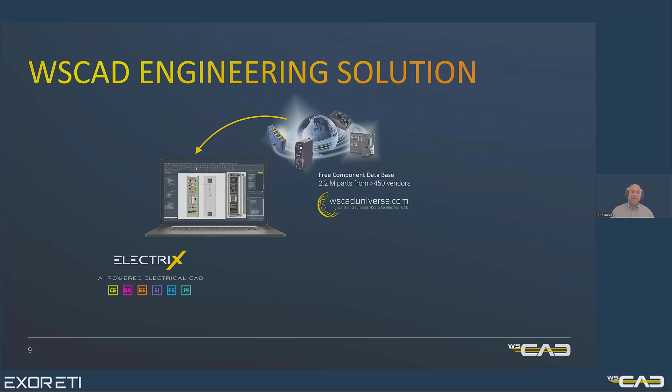The WSCAD engineering solution is built around 3 main components. The first component is ELECTRIX AI, the main engineering platform. This is where all design work is created. The second component is WSCAD Universe, the engineering data platform and one of the largest part databases on the market. It includes more than 2.2 million components from over 450 manufacturers, all available for direct download into the project.

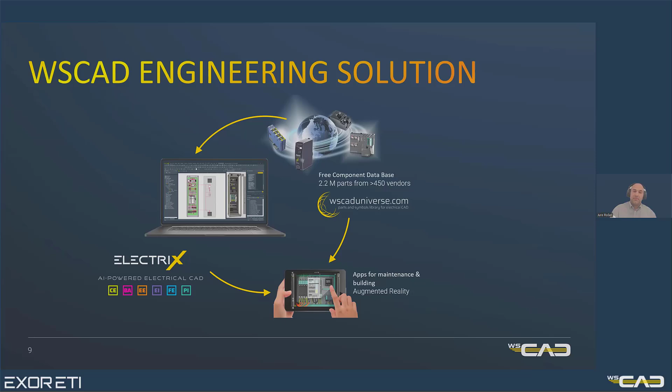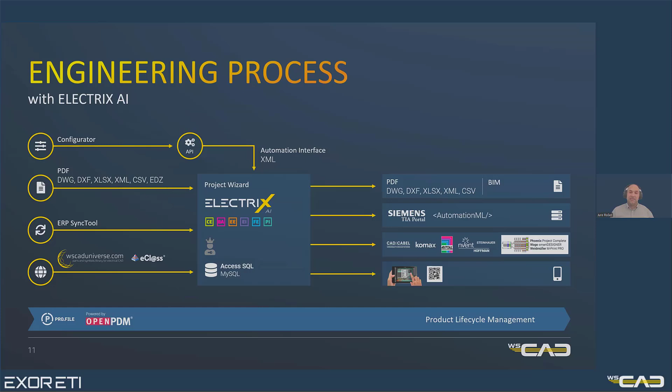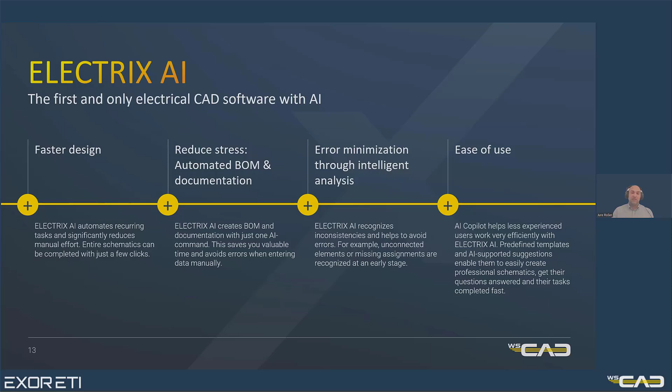AI also checks the project, immediately alerts you to missing connections or inconsistencies, and minimizes errors before they become actual problems. The AI Copilot helps users with smart suggestions, so even less experienced designers can work confidently. In short, AI accelerates your work, keeps your documentation clean, and reduces the manual effort in every project.

Let's check a few new features of WSCAD ELECTRIX AI 2026. In AI Copilot there is a new menu called Own Knowledge, which can be used to query information from different types of documents, PDF, TXT, DOCX, that were previously uploaded to AI Own Knowledge. These documents can be added for all projects or just for a single project.

We also have a new AI translation option and lexicon, which can be used to translate text into the listed languages. On cabinet pages, you can use a tape measure with adjustable measurement units. We could speak more about those features, but let's leave that to Gasper.

And with that, we have reached the main part of today's workshop, the demonstration of AI in engineering. I'm very happy to introduce Gasper Ponepšek. Gasper is a WSCAD technical consultant, and today he will show how AI is used in real engineering projects.

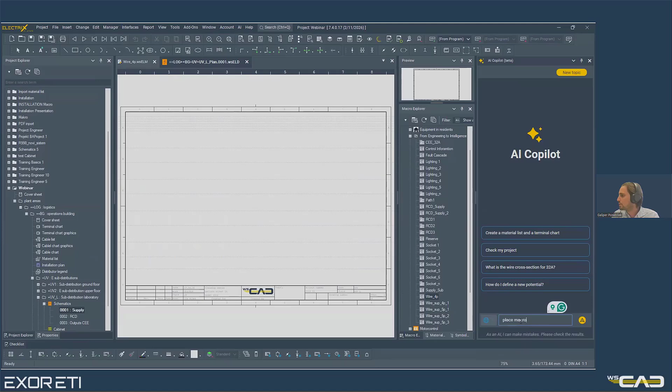On the left, you can see we have one project prepared. This is a brewery project. It's empty right now, and we will insert some pages in the laboratory field. Let's say 3 pages at first, and we will add the names of the pages: supply, RCD, outputs CEE. As we said, we will use AI Copilot a lot, and we can also place macros with it. With the hash, we can easily find, for example, supply for the first page. And you can see AI Copilot successfully placed the macro on the first page.

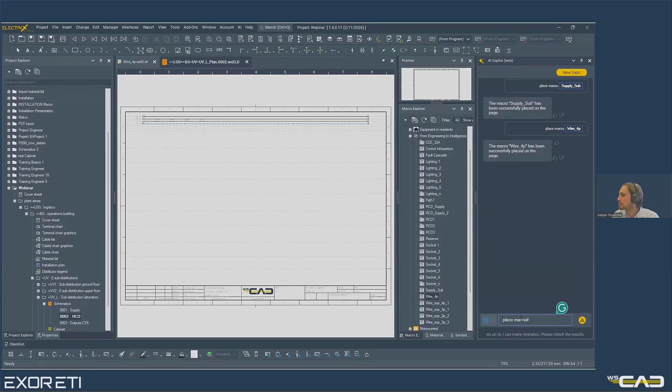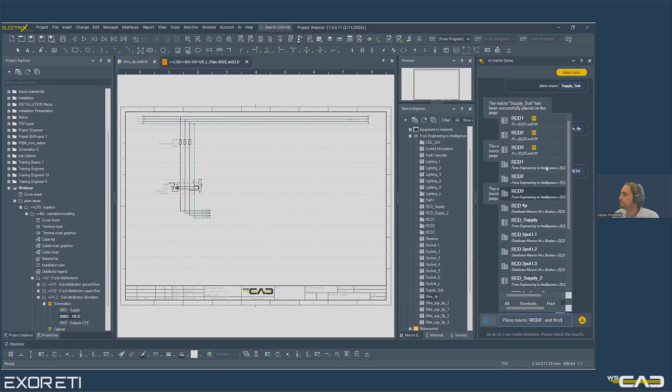On the second page, let's say we need wires. First, we just need 4 wires, and the macro is placed. We can also place more macros on one page with AI Copilot. We can place an RCD. Okay, AI Copilot placed the macro, and maybe we can place 2 macros with one command. For example, RCD2 and RCD3. Let's check if it works. Yes, first, second. You can see we get 2 macros from one command.

On the next page we can also check another thing. Place macro, again we need wires, so 5 wires for CEE. No, I don't see any macro, so we can correct it. No, it's not. Yes, here we have the macro.

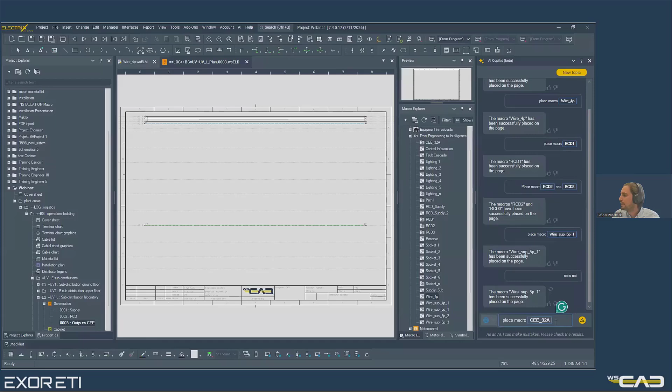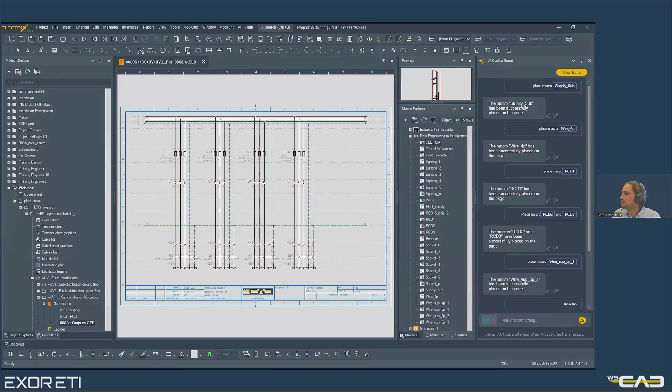We can also place path macros. We can check this CEE for 32 amperes, and let's try to write 4 times. We will see what happens. You will see AI Copilot placed 4 macros. That's good, but still, in my opinion, there is a faster way with Project Wizard.

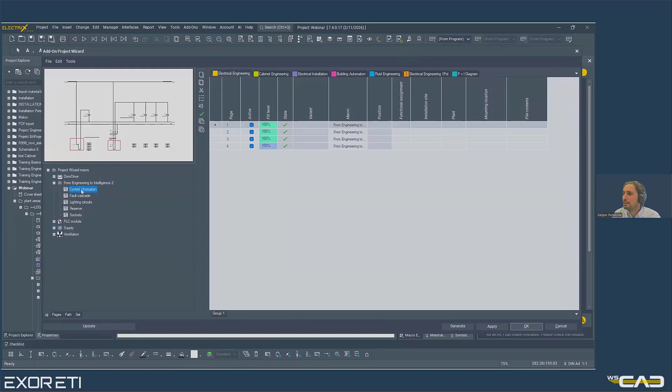Project Wizard, you also get a light version with a Professional or above license. What we have to do now is place some new pages so that we have more schematics. We'll place the page macros, as you can see. We have to rename and also change page numbers from 4 to 8. And you can see this is actually the brewery project. The structure of the project is quite complex.

So we have to fill in the functional assignment and installation site, and of course define the mounting location of this laboratory. What is also missing are the names of the pages. So we can click apply and generate. And here, of course, we have to define where to generate, in the laboratory field. Okay. The pages are generated.

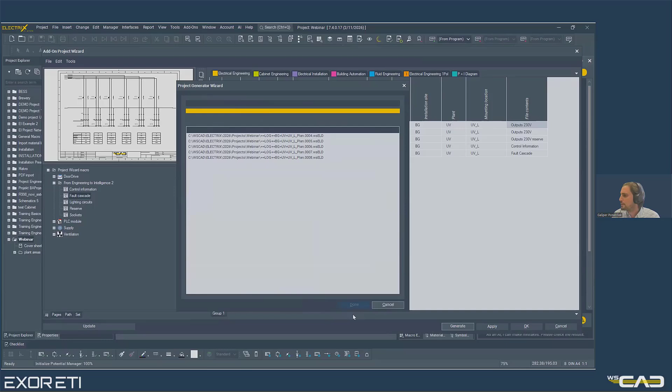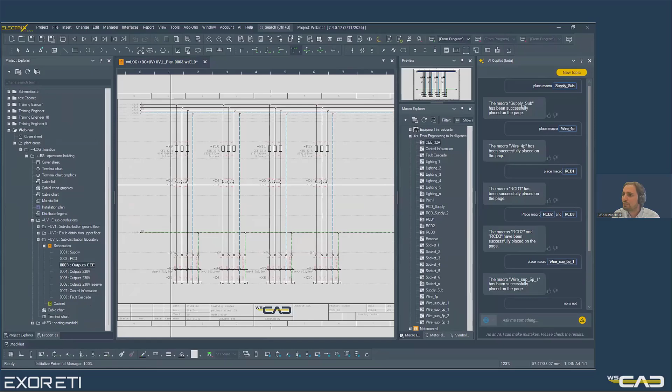We can just remove the additional window to the left, and you can see we have more pages. So here on the next page, control information. Great. You can see here the cross references. We just connected the previous design, so contactor with the next one.

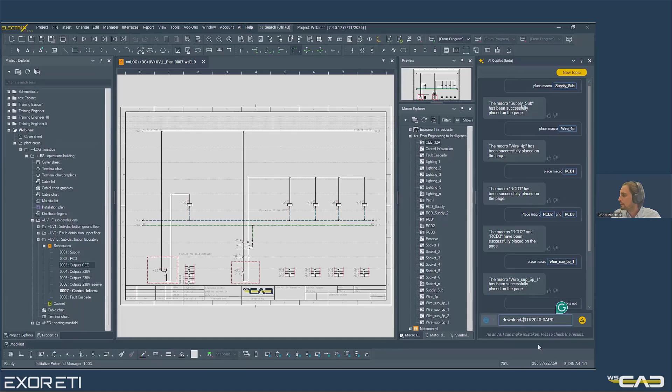That's also good. Then here we can also show you that it is possible to download the part directly from the WSCAD Universe from AI Copilot. What we need to do, again, command download, then hash, and part number. And here we can also save some time. So you can see we already have the part from WSCAD Universe, our cloud platform, directly in our local database. So the part has been successfully downloaded.

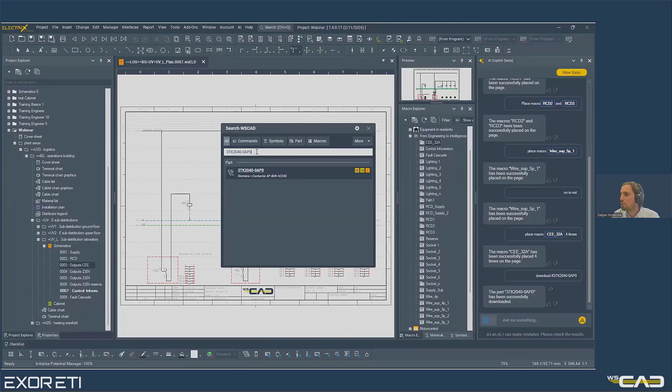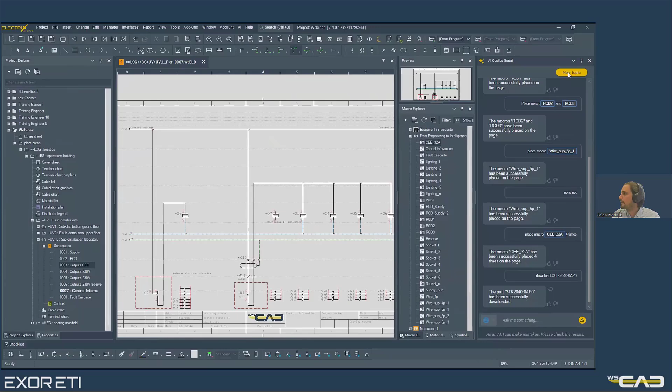We can just check with our feature Control Q. We just open the part, find the part from our local database. We don't need to open our database and just place the contactor from the WSCAD Universe with all information. That's how it goes now. There is a possibility to work faster.

And if we want to translate the project, for example, we want to translate this project into Slovenian language. Let's try it. So in this post-processing panel, you don't see any Slovenian words right now. We can just select all of them, and we just click the AI translation button, and AI will translate all these words for us. But for now, at once, you can translate up to approximately 50 words.

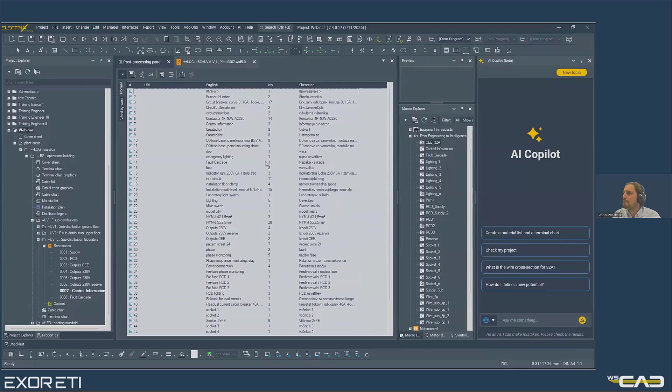So here you can see we have the translated post-processing panel with Slovenian words. What we have to do also, there is a button, Save Selection in Lexicon Database. And we just transfer all these words into our lexicon. Now we have the possibility to translate again, and probably our translation will be successful.

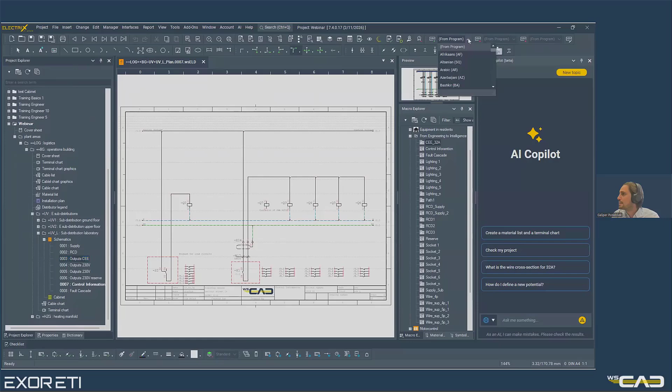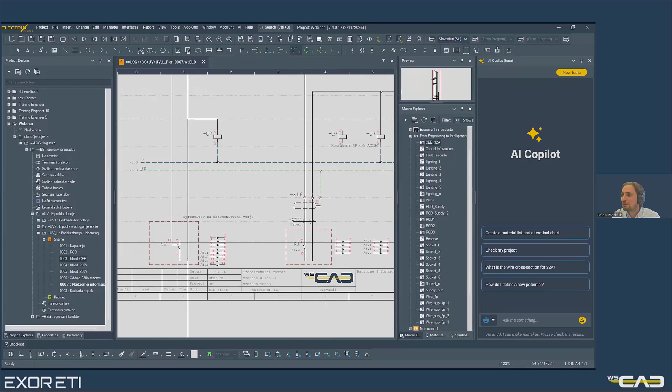We don't need this post-processing panel anymore. Here you see already there are some words which were translated, and we have to just set the Slovenian language and check what our translation looks like. So here we have izobraževalni center, then napajanje, and at first sight it looks good, especially for that amount of time. Nadzor faze pred varovalko, this is correct.

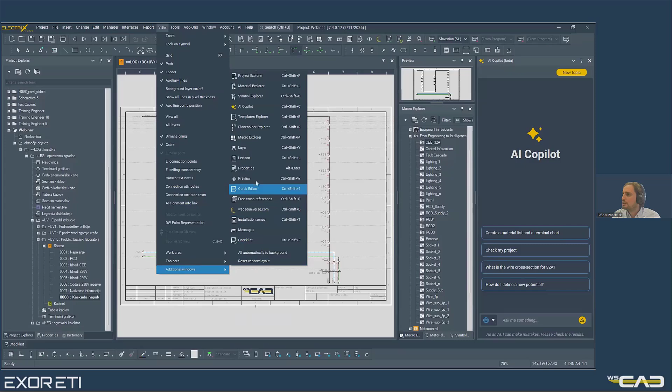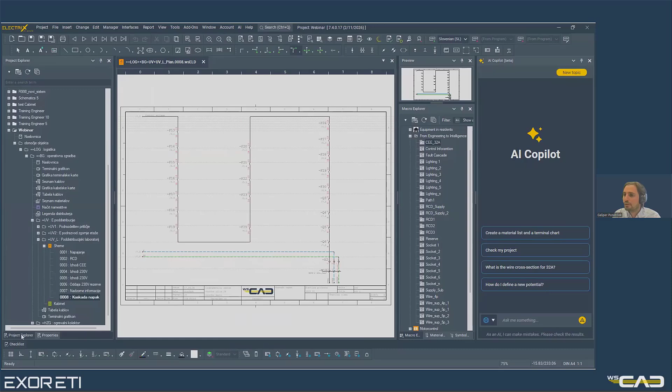So yes, you can see that we can save a lot of time with this translation. And here we have the lexicon. You can see this is the last column, Slovenian, where these words from the post-processing panel were transferred. So that's it.

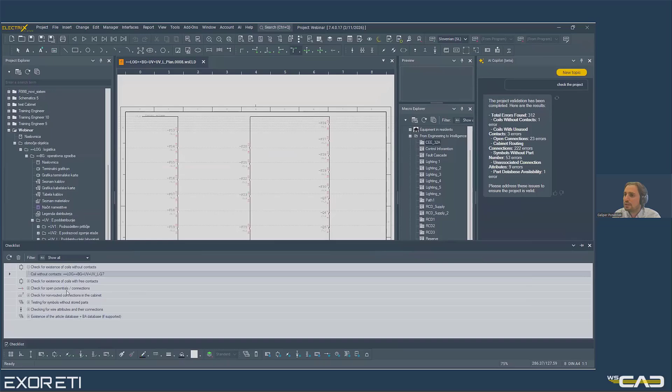And here we can also check the project. We can check the project. And so you can see there are some errors found. We can go directly to this coil without contacts. This is the coil which we just inserted. And here are also the open connections. We can just jump to some other pages, and here we can directly see where our open connections are, and so on. We can check all errors or warnings.

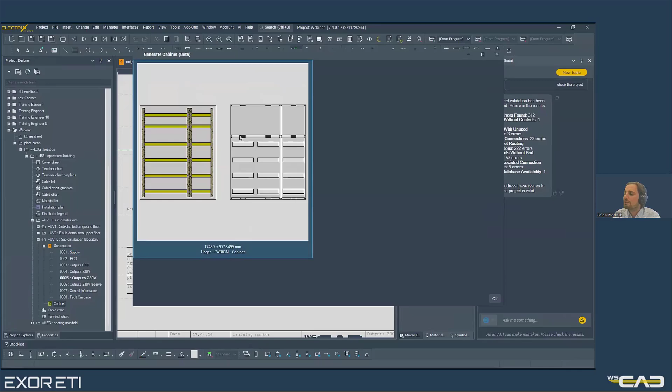So with the AI Copilot, we will just set this language back to English. And what we can do right now also, we can generate the cabinet from the information, the parts which we just placed on the 3-pole scheme. We just selected 4 pages, and here we can generate, all the elements will be placed on this mounting panel, on these DIN rails.

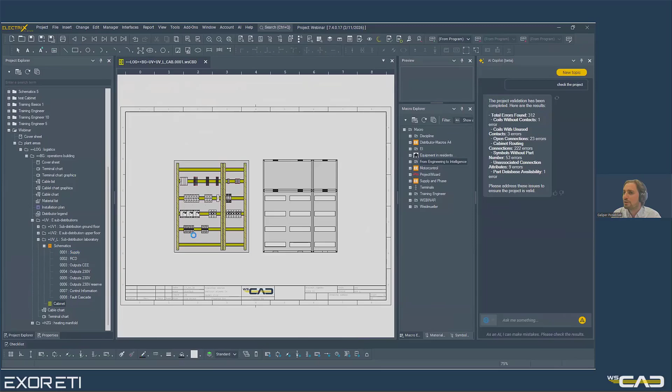So you can see automatically the cabinet was generated, and all these parts from the 3-pole scheme are placed right now on the mounting panel. First, we will just hide the AI Copilot, and let's check more deeply the Material Explorer. You can see everything is here, and this was one of the first generations of AI Copilot of this project. At first, there could be some minor mistakes, as you can see right now, but we can easily fix it and place it in the proper position.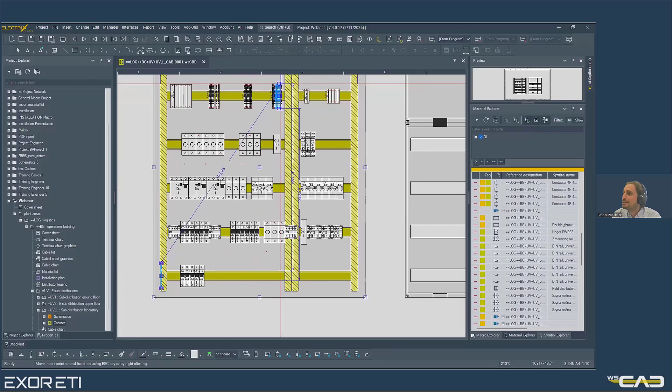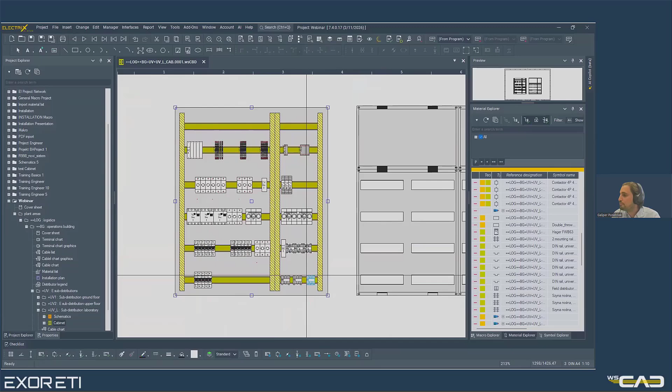The more often you generate the cabinet, the more detailed result you get. So that's also some information good to know. So what we have to do also, we can replace these 3 components, and we already have mostly the finished project in the cabinet. That's also very interesting.

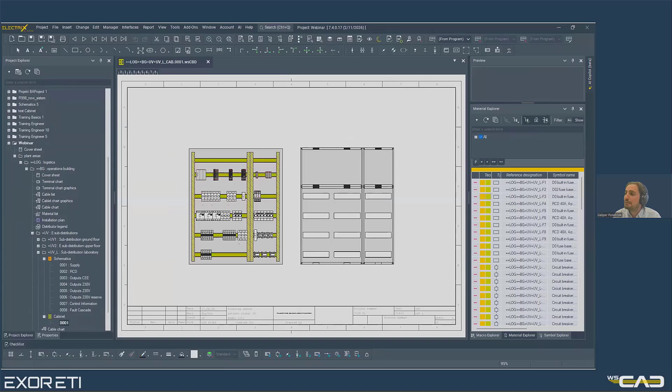And here, what is very nice, we have this Material Explorer. We can just jump from one discipline to another. We have these cross references, so also in the PDF later, you can jump from one discipline to another. Then we have this technology navigator. Right now it just navigates between 2 disciplines, between the 3-pole scheme and cabinet, but of course, there's also the possibility to navigate through other disciplines.

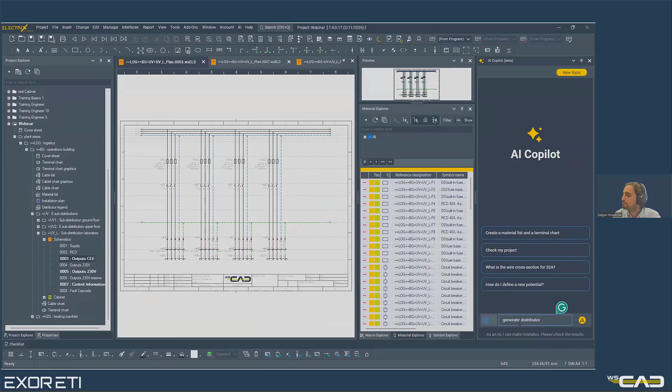Again, if we go forward, we can also generate reports, for example, distributor legend. So let's check our distributor legend from this part of the project, from this laboratory. You can see we get the report generated from AI Copilot. We can also generate more reports at once with one command. Let's say generate material list, cable list, and terminal chart.

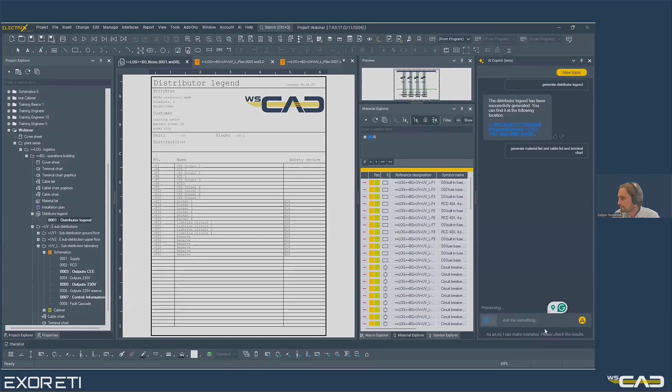So you can check the material list was generated, cable list, it's here, and still is processing. And yeah, we got the terminal chart. We can just jump to page 6. We can check this X8

terminal strip. So we can also generate material list into Excel or some different formats, but not just material list. We can generate a lot of different reports into different formats. For example, now we can just check our material list in Excel, and maybe we don't need all the columns, all the information.

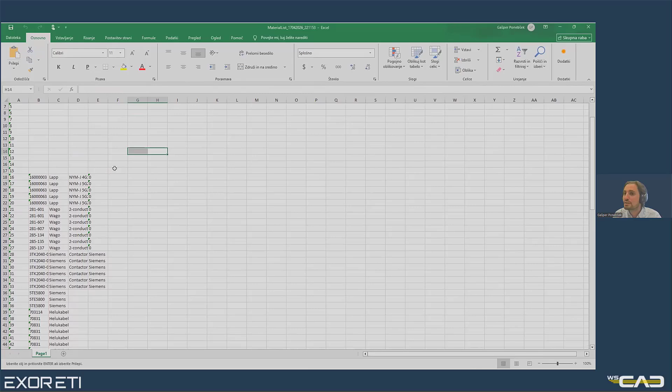We can just select what we need in Excel, which information are useful for us. Maybe we can just generate these columns. So part, manufacturer, component, you can see it's like that. And also, this is not it. We can also filter it. We can also make a calculation, make equations here. We can get with AI Copilot the final Excel with calculations.

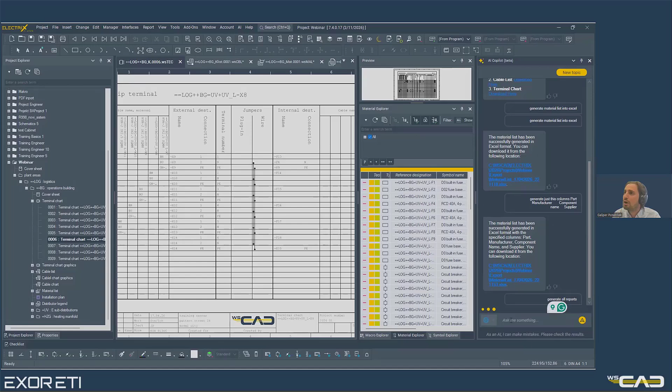And what we can do now, we can also generate, let's say, all reports at the end. But I wouldn't recommend this feature, this function to do it here, because we already have option to go to report and generate them all. It's probably a better way. But yeah, you can see we can also generate all reports from AI Copilot.

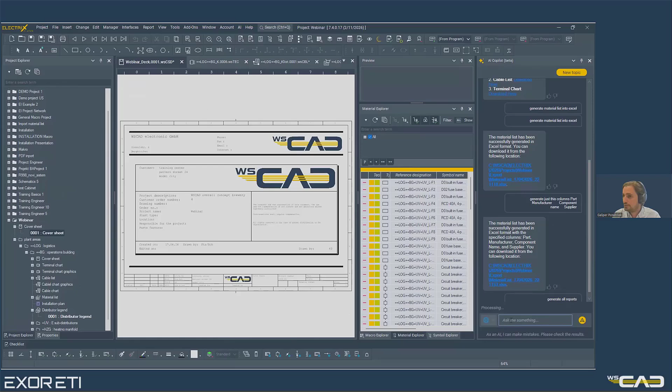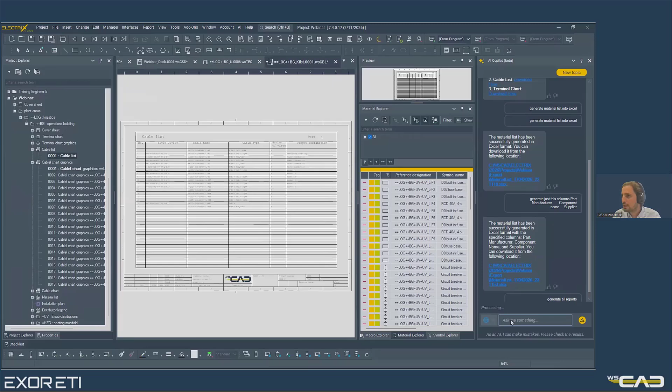So the reports are generated. It looks that we almost have all reports in our project. Cable chart. Yes, we got all the reports, and we can just export everything into PDF. So output with symbol parameters, and let's check our final project in PDF.

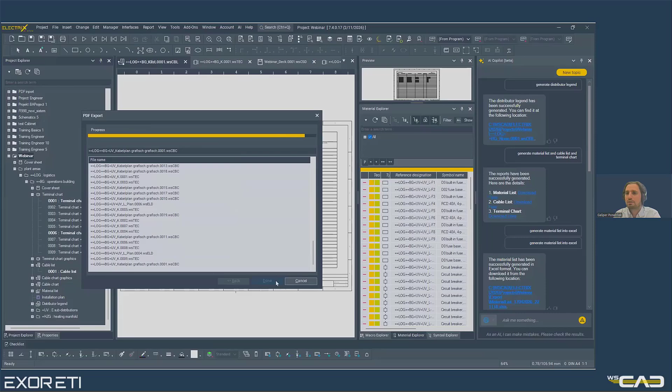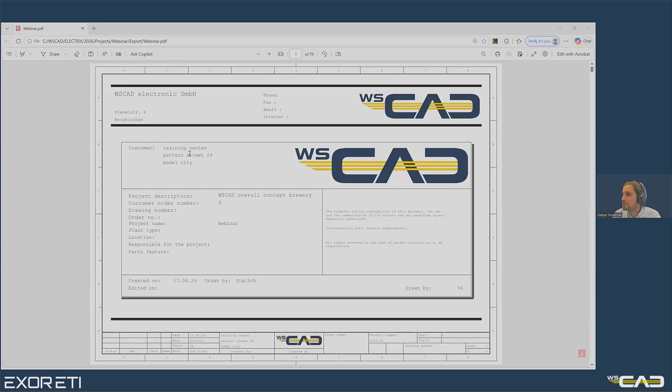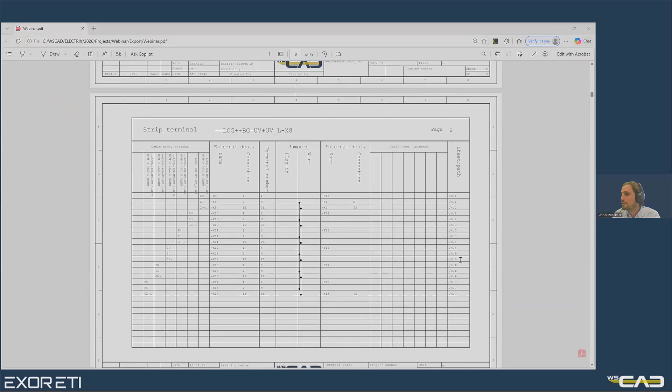So 79 pages with all reports. Probably we don't need all of them, but just to see that we have a lot of different templates. This is the terminal chart, terminal strip, so one of important. And here you can see already, yes, we have a lot of graphical reports for terminal chart or cable chart. This is very easy to read for electricians.

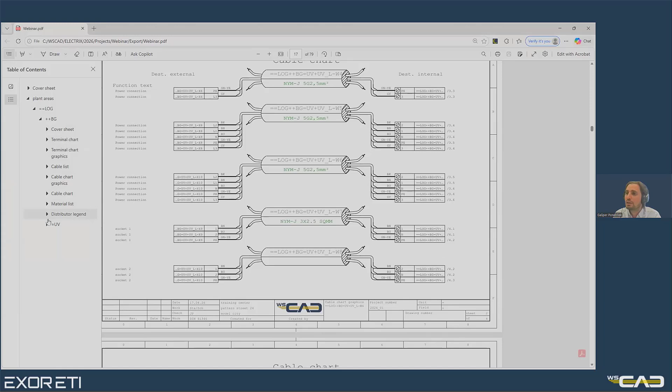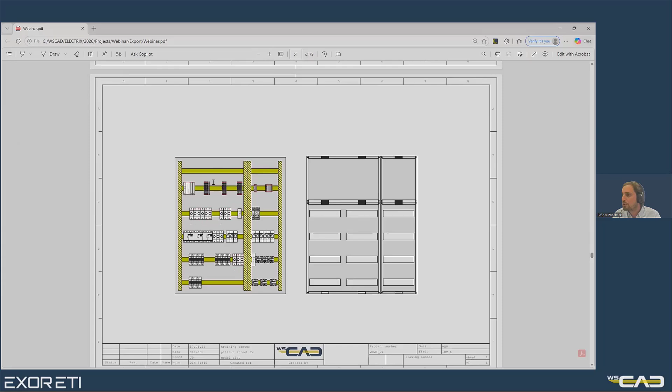Then here are also the table of contents where we can navigate through our project. We can now just go directly to schematics. And yes, here, of course, we can jump from one page to another with these cross references. And here, maybe you can see there is a possibility, of course, to jump from one discipline to another. And yes, this is it. You can see the final product. Maybe for now we can go back to you, Jure.